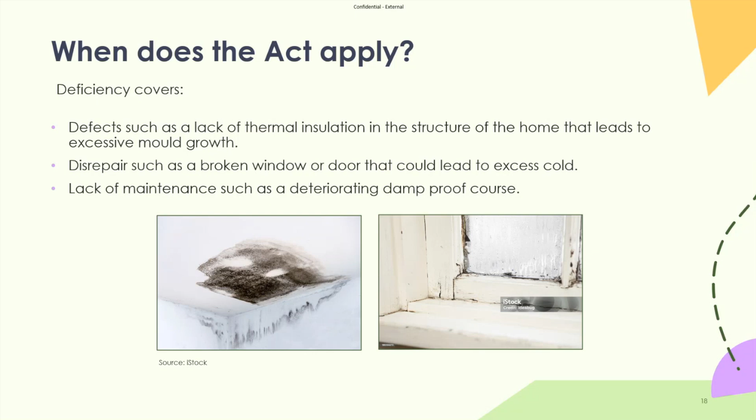From the two examples I've shared, it's clear that there are still some aspects which we will all have questions on, and I would encourage everyone to utilise the feedback and clarification mechanism provided on the government website to help shape any future amendments made, because as I've referenced, the government want to trial this and want to take on board feedback which may be introduced through the phased approach.

How are hazards notified? I mentioned earlier this could be a notification from the tenant via various forms of communication with the landlord or by other means. And it's the other means that I would be very cautious about as a landlord. Landlords' legal obligation under Awaab's Law is when they become aware of the hazard, which is day 0.

Becoming aware is prescribed in the Act as discovering a potential hazard during a routine inspection or visit, carrying out an investigation into a different or related hazard under Awaab's Law, being notified by a third party, including contractors, being notified by a regulator or other body, or a tenant raising an issue affecting their home, or someone raising an issue on the behalf of the tenant.

Anyone commissioned by the landlord to enter the property, whether that be domestic energy assessors, retrofit assessors, or installers, have a duty to report potential hazards to the landlord if they become aware of them during their visit. What are the type of hazards? I referenced earlier when we looked at the flowchart, there are 2 types, significant and emergency.

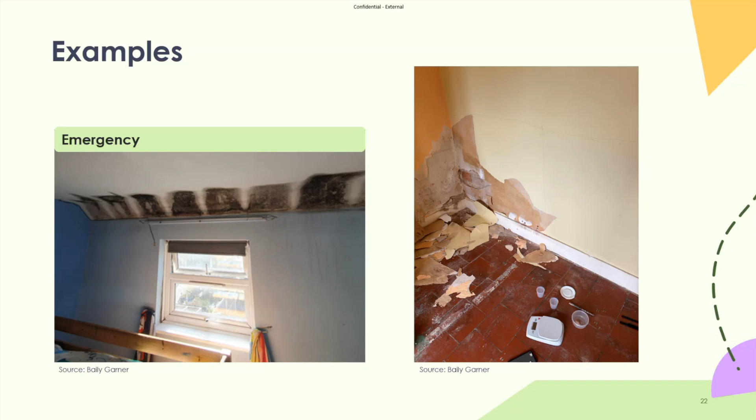Well, you wouldn't be wrong if you voted emergency. It is indeed an emergency hazard. And that's due to the age-related vulnerability of the occupier, it being a bedroom, and just the expanse of mold growth present. And this is unfortunately something that we see far too often and is an example of missed opportunities at design, PIBI and installation stage.

It's worth noting that this particular example was not carried out following the PAS standard and was just an isolated loft top-up. And I think that really demonstrates the value that following the PAS standard can have to avoid circumstances such as these.

Okay, then for the next example on the right, we have isolated peeling wallpaper as a result of some low-level dampness on the ground floor of a property occupied by 2 adults, neither of whom have any health conditions currently. On triaging, you've determined it is in scope of Awaab's law, but is it emergency or is it significant? Seeing lots of significant this time around, Lucy. 1 emergency. Okay, I think we're getting the hang of it.

Now, I would caveat that this is our view on this in the absence of any provided examples in the guidance. But our view is that it is a significant hazard. There is no mold growth. The area of dampness is isolated to the ground floor and the occupiers have no current health or age-related vulnerabilities. However, as health could be impacted by ongoing dampness, this is why it would fall in scope.

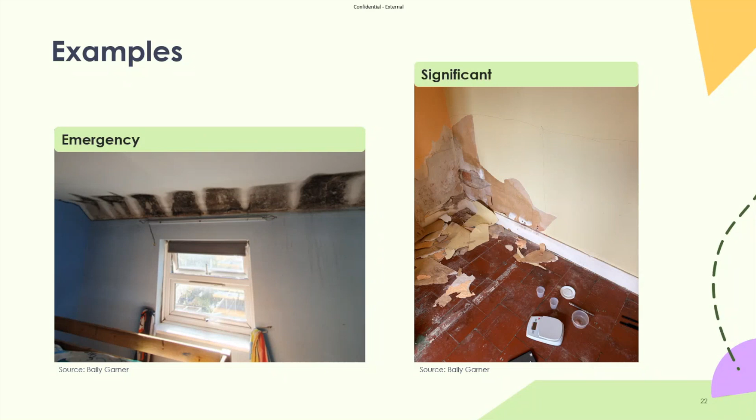Okay, next one. This is an interesting one, and this case study actually relates to both photos on screen. The tenant at this property reported some mold growth and significant condensation issues, citing that the heating system wasn't providing adequate heat. On arrival, the boiler was off, fan spurs were off, and internal temperatures were 12.1 degrees, with relative humidity of 70.7% as shown on the photo of the hygrometer.

Now, referencing back to determining when hazards are in scope, as a reminder, it must be in the landlord's control to fix and not be damage as a result of breach of contract by the tenant. This property was not being heated. The fan spurs were off. There was mold growth proven to be caused by condensation generated within the property, not condensation generating defects.

The heating system was fully checked, was suitably sized and in working order, with insulation levels in the property adequate to retain the heat. Would this be in scope of Awaab's law? For this, if we have a simple yes or no. Not in scope from Loretta. Yeah, no, no. I think we're unanimous on that one, Lucy.

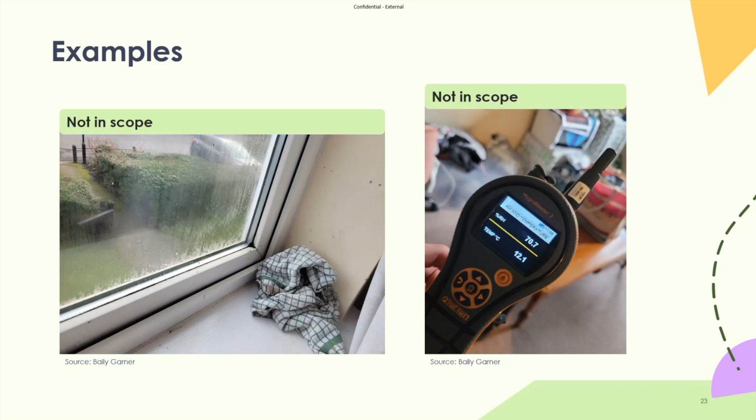The Awaab's law guidance document then goes on to detail the process for investigations, the written summary itself, making safe works and beginning further repair works. But perhaps that could be covered in another session, because I'm going to move on now to the implications for retrofit.

I'm sure we've all come across examples of where retrofit has not had the desired outcomes. Bailly Garner certainly have, whether that be in a retrofit technical capacity, auditing role, or survey role. And all of these examples could end up in the scope of Awaab's Law due to the associated defects that could occur, which is why the retrofit assessment and subsequent PIBI is absolutely crucial to identify defects that may prevent a measure being installed correctly.

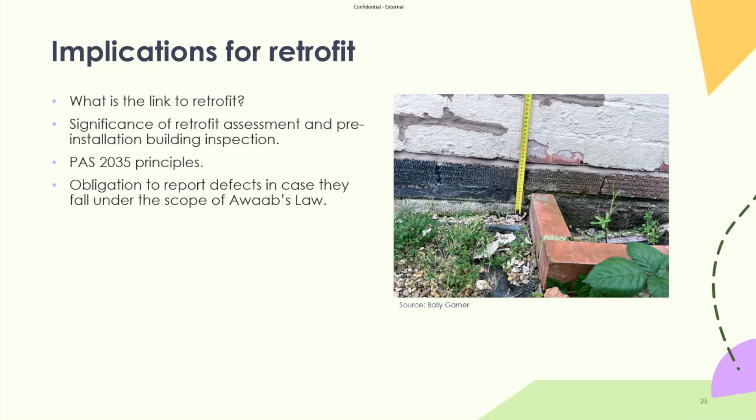Following the PAS 2035 principles sets out a methodology to minimise these risks. And I've referenced already the procedure for the notification of hazards and that obligation to report hazards to the landlord, which may or may not be relevant to the retrofit works. In some cases, the defects actually materialise after the retrofit installation, with the cause often being poor detailing and or poor workmanship, with missed opportunities at various stages of the PAS process.

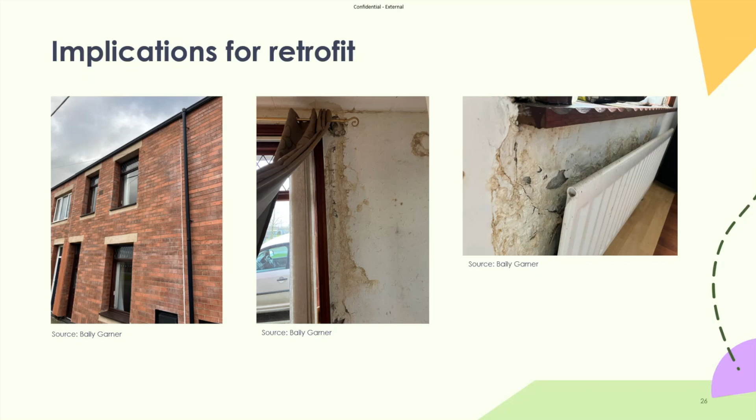Here is another example on the screen where retrofit hasn't had the desired outcome, and in fact a widespread issue. It was such a widespread issue that it was bad press for retrofit and lost public confidence in retrofit at the time. This case study is the EWI scheme in Fishwick, Preston, which is publicly available should anyone wish to read up further.

And the scheme involved the installation of EWI to solid wall properties, which subsequently failed and led to significant damp-related defects. It is cited in some reports that have been produced that the failed EWI was as a result of poor detailing and poor workmanship. Again, this would be in scope of Awaab's Law. Examples like this in the public domain give retrofit a bad name, and I think we all have a part to play in learning from this and preventing its reoccurrence.

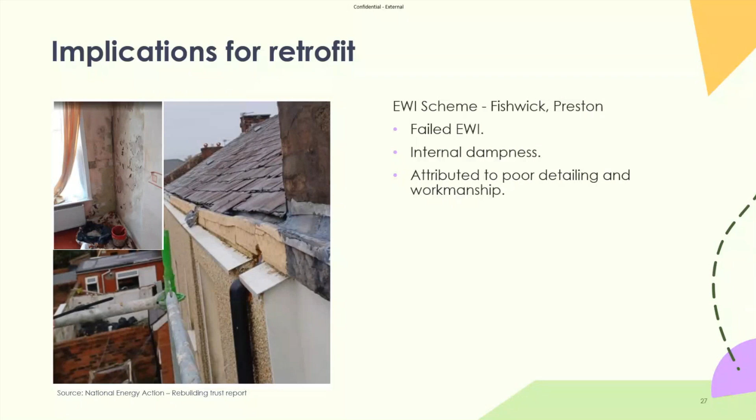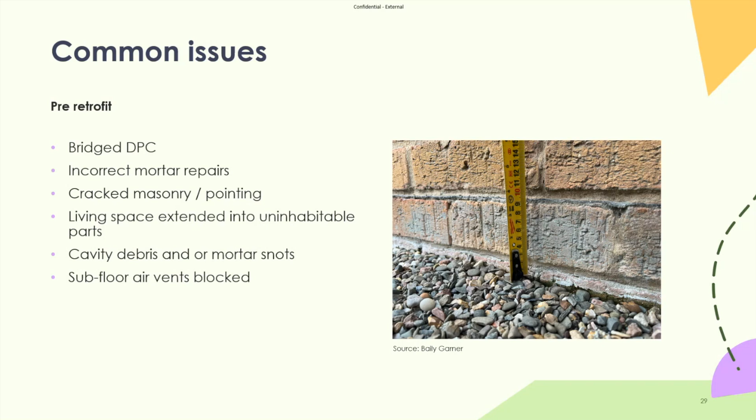All of these examples have the propensity to cause damp, mould and condensation issues, which places significant responsibility on anyone working in the retrofit arena to have an awareness of Awaab's Law and understand the potential impact of sub-quality installations. The whole purpose of retrofit is to create warmer, more comfortable homes and ensure this is done without creating hazards that could fall into the scope of Awaab's Law.